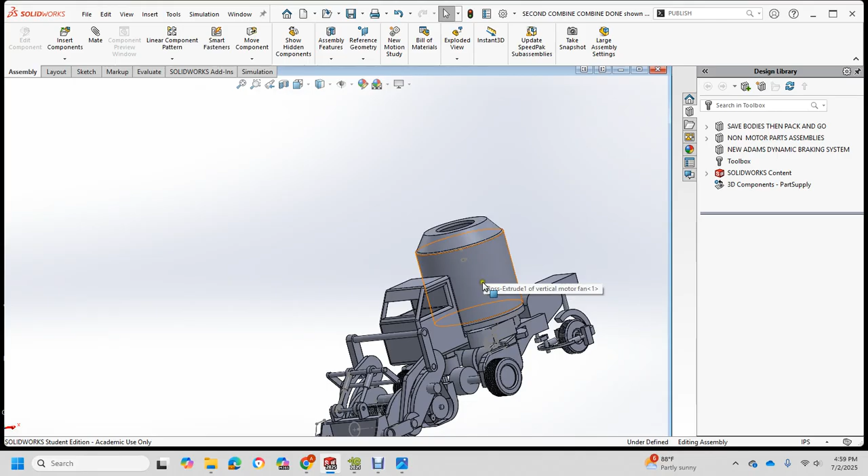I had something like a vertical diesel four-cylinder, and I made a generic generator set for it, and some of them haven't been done yet. I did draw it would have a hydraulic hose line, kind of like a gas station, with different setups hooking up to the pistons here, and maybe there'll be a piston up here so it pushes that down. But anyway, that would be a side job for the hydraulic pressure.

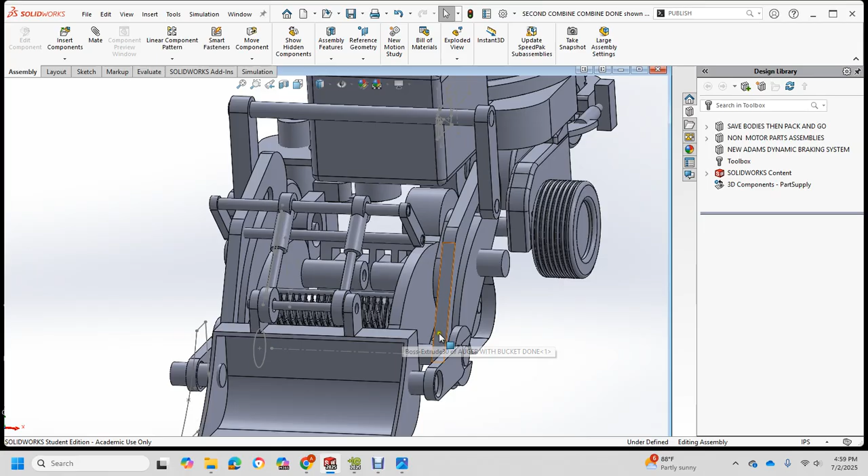But other than that, we have drawn our auger, also with the bucket extension. Over here is the gear belt. This has been explained in a different video. This isn't really needed, but I had to edit it out of the other drawing.

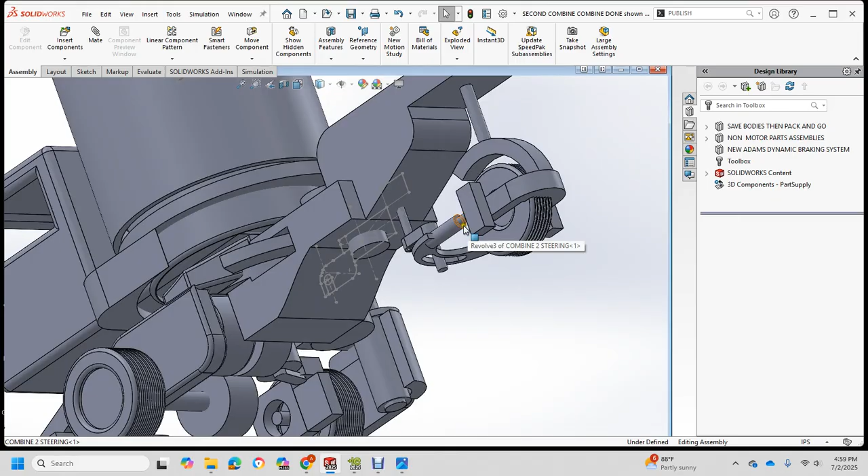Anyway, here's the combine. There's the office, with two pistons in the back, so it kind of works like a left and right hand piston. There's going to be a hose connected up to here that turns it left or right, and that's on a swivel, and it moves on the offset here.

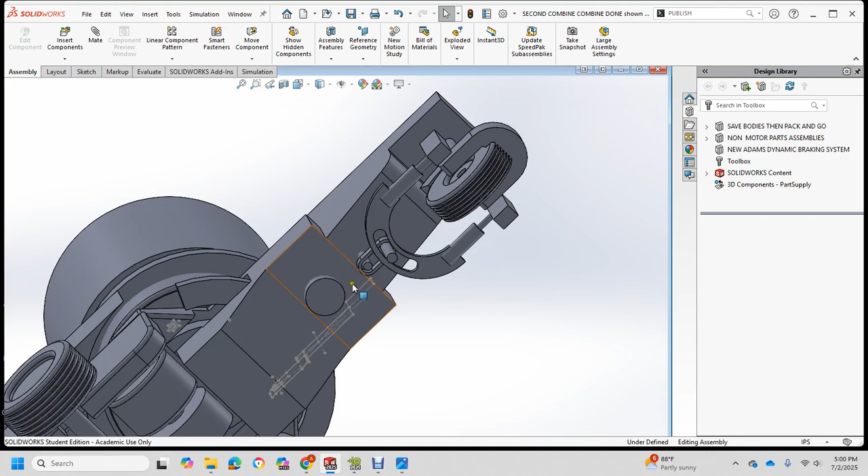And there's the kingpin, and it rockers around so you get right and left motion. And then there's a gear, and then I'll show you the bottom. Alright, the bottom has an offset wheel to the left.

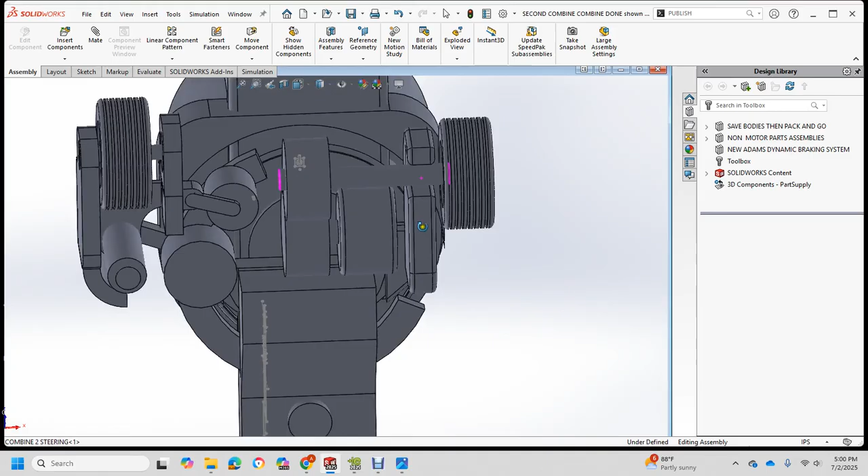Over here is the main generator with the gear sets. This is a side bolster that holds the wing, like in a truck. And there, like I have a bearing journal for that, but it's in my traction motor. The traction motors, and the wheel bearing journal are on a different drawing.

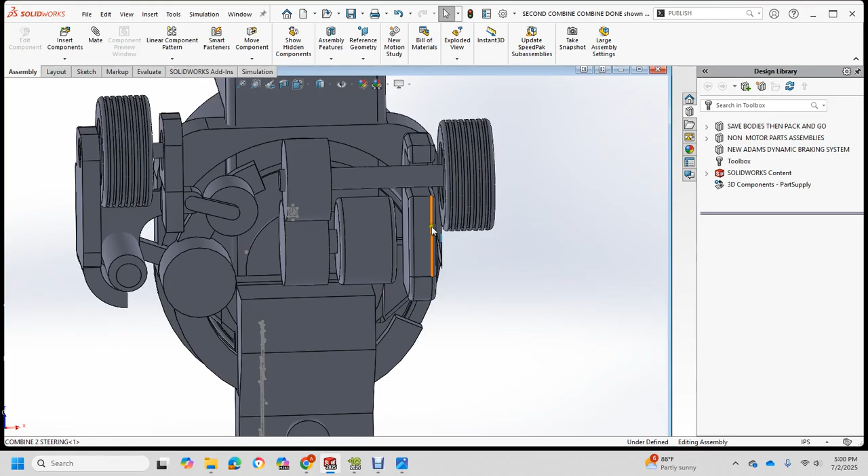In my train drawings, what you have here is an independent wheel that's offset to the side, and it moves on a ring, this ring right here, which is also carried out to here. There's four different pins here.

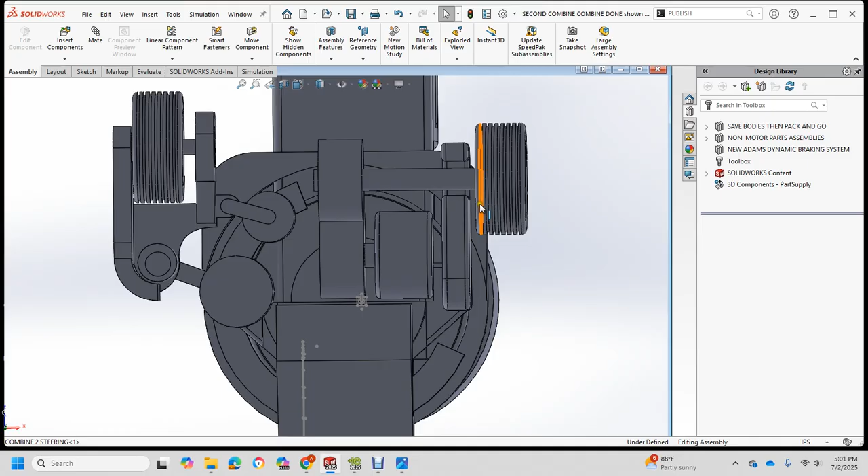So when you make a left, it swings out, and this wheel becomes forward because this one's tangent due to the traction motor, so this one just spins. Then in the back, you have your pistons to the left or right, and then the kingpin, which swivels it.

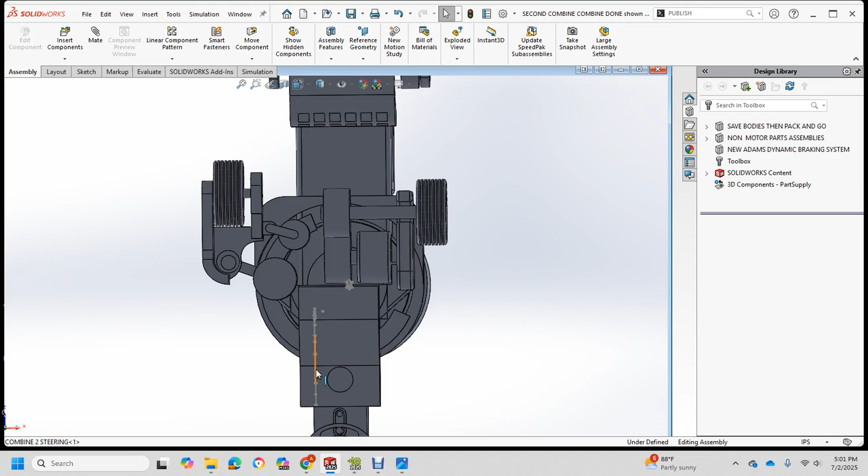So when it chokes this way, it stops at a certain part here. Here's the gear. This is geared and that's geared, so it mates, and you don't get so quick of a turn. So there'd be pistons here, left and right, kind of like on a lawnmower with like a pod racer kind of thing.

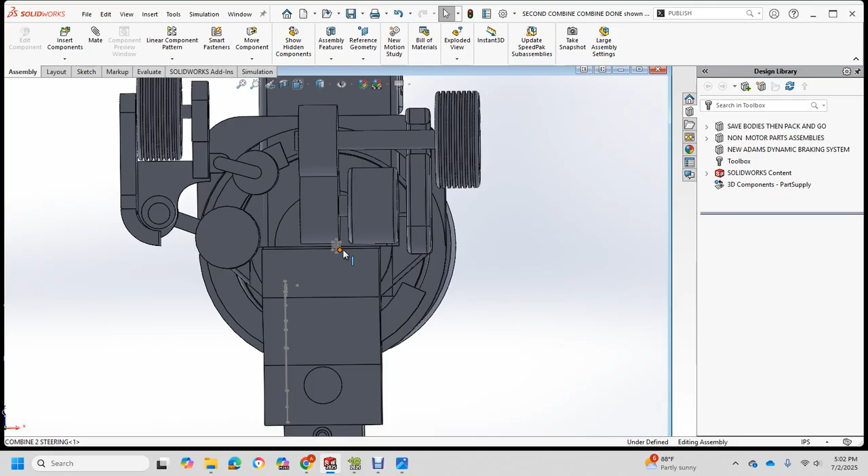And then a throttle switch, and then a knife switch that breaks, a little door switch, kind of like your door, and that knife switch shuts off the electric to the traction motor to stop the traction.

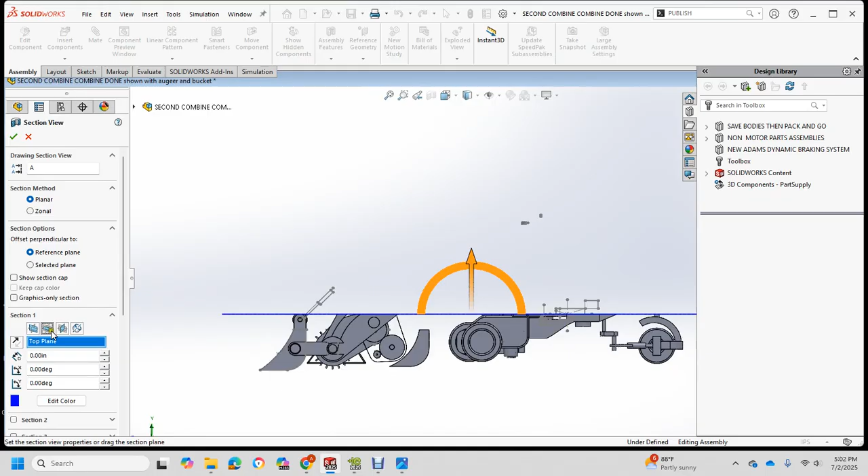And then over here, we'll take a look at the side view, and then we'll do a cross section of it. Let me dock that over here. So here's the middle of that.

We have a radiator fan, a generator, and then we have the lateral motor that I built. It's a four-cylinder diesel motor. It turns the generator. You can see the lateral vertical motor in other parts.

I was going to use the same one, this same one here that's highlighted in orange in my locomotive drawings, but it was way too tall with the hydraulic generator, so the generator just goes down here. So the sides are packed, if you watch the lateral video.

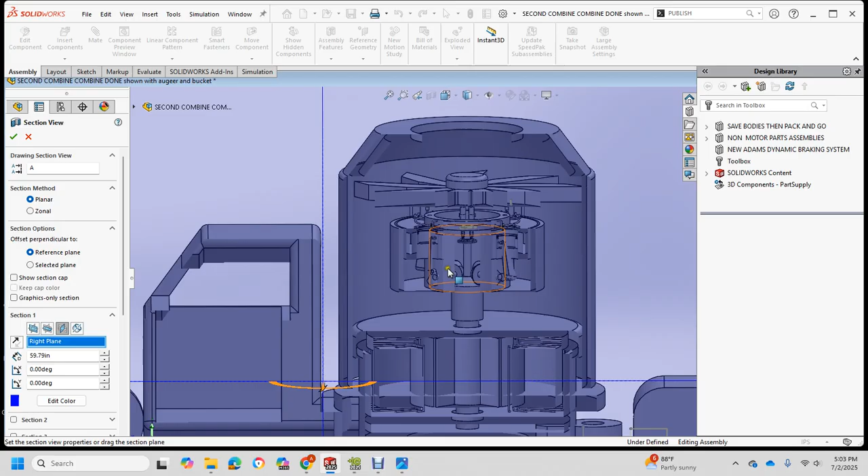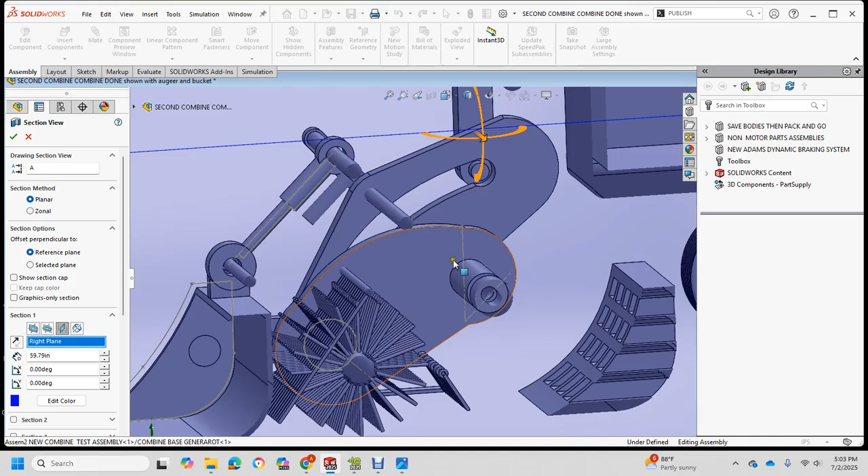So we're looking at a fuel tank and hoses for the hydraulics, and in the cab you'd have a switch, and that's how that works. Over here you have an auger, different video, bucket, different pins come unhooked, then you're back to the auger, and then this is a thing.

So actually, over here would be if I wanted to make another dog bone to the side over there, that's how I would do it. I couldn't touch these when assembling them because they were two different drawings and they're both complex. So if I touched it and mated these perfectly together, the computer would crash because that's like 200 different rows here, and so that's the combine.

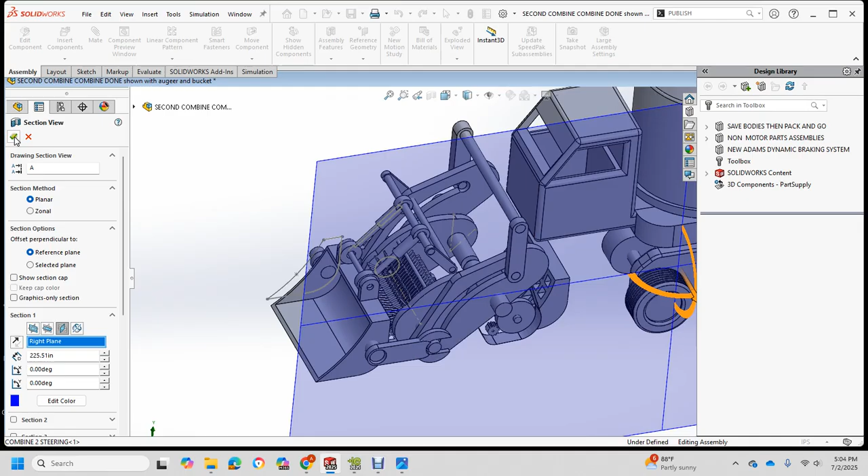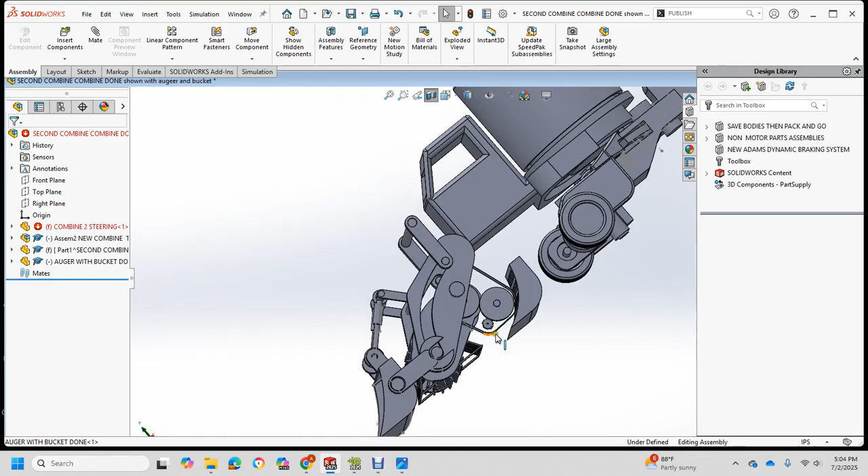I developed this. The belts, this little key right here, locks it in belts. There's a belt that keeps it from moving back the bone, and then over here you have the belt to the auger. These are traction motors.

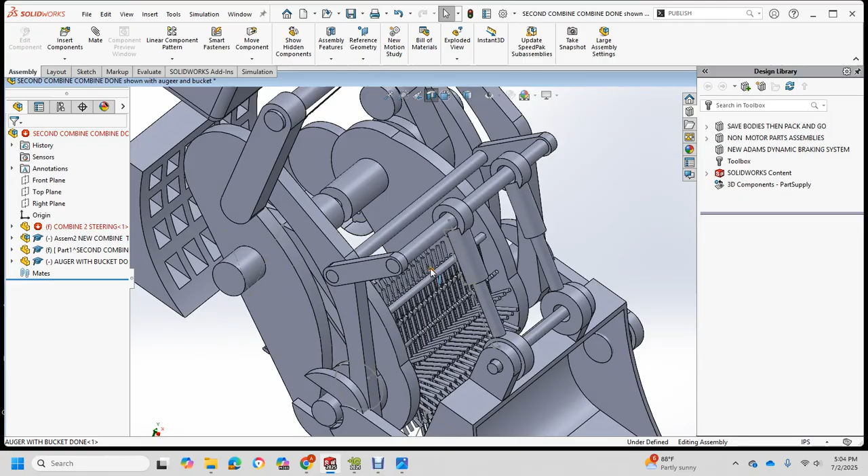I could have done them a little bigger, but like I said, the traction motor is kind of the same thing off my locomotive drawing, but this is broken, so there's one for the gears and one for the belt.

And that's the first look at my combine. Okay.